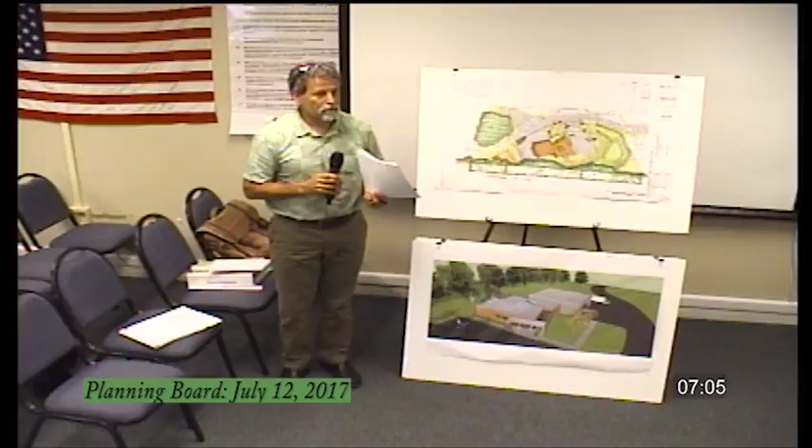If we've missed any, we can certainly discuss those tonight. But I'll walk down through the changes that we've made to the plans. There were a number of conditions that the board had suggested we add as notes to the plans, so I'd like to at least summarize or go through those individually.

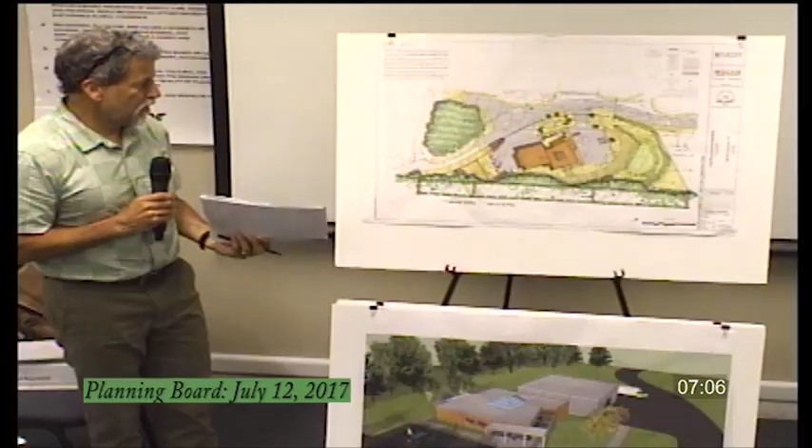On the drawings, I'm going to refer to this site plan, and I'll flip through other site plans if I need to point out items. Item number 1 was the zoning, and the zoning line is shown on the updated plan. The 1,000-foot line that Chris had mentioned for the industrial zone comes right back into this area just beyond the property line, measured from the edge of the right-of-way. So we've added that to the drawings.

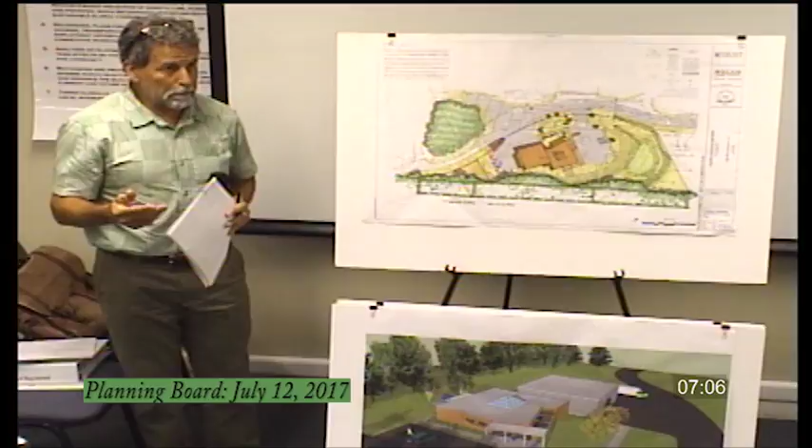Number 2 is that there was a discussion briefly at the board about the buffer, item number 2, along the buffer required under section 4G8, I think it is, under the industrial zoning. I'm just going from memory. That buffer is required between an industrial or commercial use and a residential use within a district line.

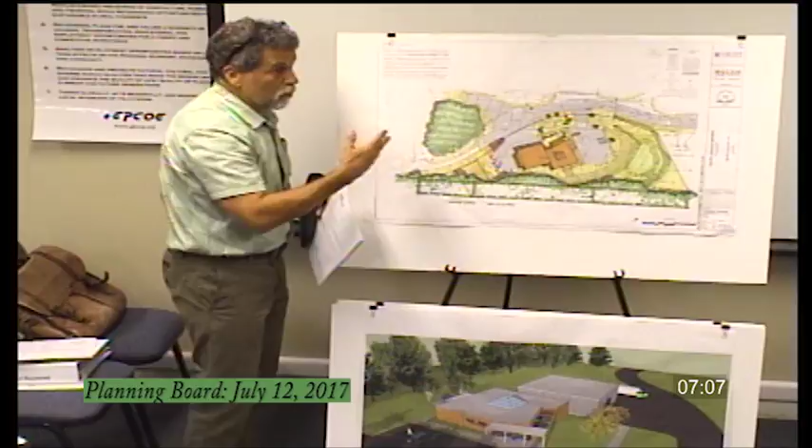I'm actually going to ask for a consideration for a change from what I've already submitted tonight. What we had put on the plans was to extend a 40-foot buffer along the whole length of the property line, and then add a 10-foot covenanted area, not shown on here, on the inside. So the total is 50 feet, and that would be a limited cut disturbance buffer, et cetera.

However, I'd like to propose something slightly different than what's shown on the plans tonight, and I'll explain why. I sent a note over to Jim and to Chris Hansen, and Jim came back with a suggestion, since the lot is such an odd shape here, sort of a fishtail. And under the ordinance, it talks about buffering the use.

Our thinking is that the basic use of the property is from about here to here, and it wouldn't really matter one way or the other. The applicants own the adjacent property, and they're thinking of doing something over there in the future. So if we were to access that property, probably the best spot is right through here. If we had a buffer there, it would really restrict the use of that property, even though we haven't planned anything there yet.

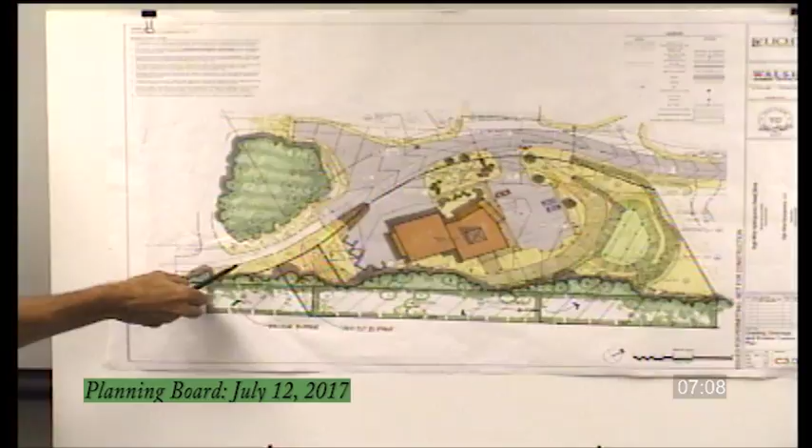So what we'd like to propose is to extend the buffer to a point shown right here—Jim had sent a sketch suggesting this—and then have 50 feet coming back into the site with trees added, so we've met the intent of the ordinance, buffering the industrial-commercial use and meeting the specific criteria, but leaving about 100 feet that, by virtue of it being a very small fishtail, isn't really part of the property, just part of the lot. So if the board is agreeable, we would submit a final condition plan showing that.

Quick question: is that new proposed line the property line or the edge of the industrial zone, or what?

I'm sorry, I should pull up the new plans and flip through them. I see the line, it's shown on sheet 2.1. But it's not really identified. I suspect it's a property line.

The zoning line, as we scale it, comes right up through this area here. So if you take that and go back 50 feet into the lot, this is the 50-foot setback from the industrial-residential zone line. In other words, a portion of this remaining part of the property is all in residential right now, and from this part forward is industrial. This whole lot across the street, not being considered now but for future development, is in the industrial zone. If that answers your question.

So you're really proposing just to take the buffer to the edge of the industrial zone property, and come in from there? Yes. Okay.

The second item discussed was a waiver of the access width. We had reduced on the plans, reduced the throat here upon suggestion from the planning board and from Jim Seymour, to sort of close up this gap. We've made this a 70-foot width, and I believe the board acknowledged that at the last meeting, and this would be grassed buffer through here.

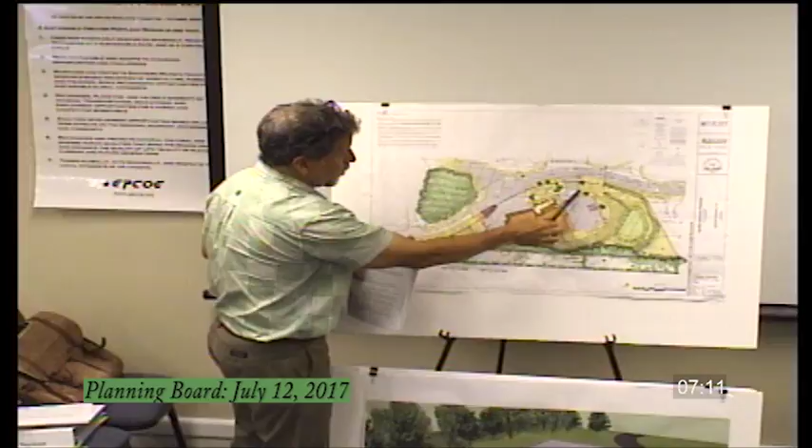So in response to his comment, we put some curbing in through here, along this edge and through here, and there's curbing on the front face too as you come into the building, and added a catch basin so the water would enter it. We already have a pipe system across here - we shifted it, so there's a catch basin here collecting road water. There's another structure here, and that all discharges in the same location.

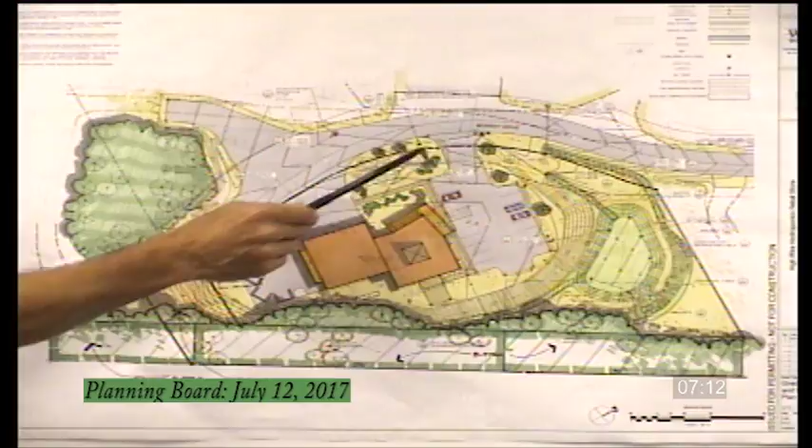So the new one's catch basin 3, correct? Yes, exactly, and we've addressed that. That's per Jim's comments, so I believe we've addressed that comment.

Item number 6 was lighting. In your packet, we added 2 light fixtures at each corner of the parking lot. These are LED cutoff fixtures, consistent with the same model being used on the building, and lighting cuts were included in your packet, the Spalding fixtures.

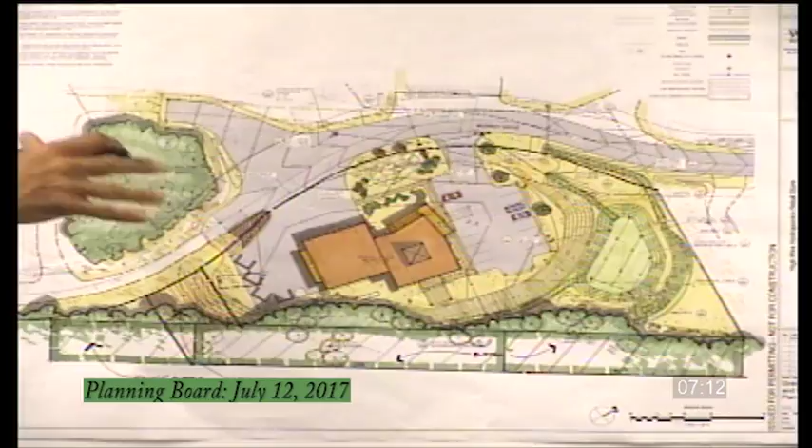And the last was landscaping. I think we were certainly in agreement, if I understood the board, that rather than go to a full landscape plan, if we use this general concept and worked it out with the planner and with Scott, or with Chris, that would be acceptable. So as part of our record, we included a reduced copy of this in your packet, if that's suitable.

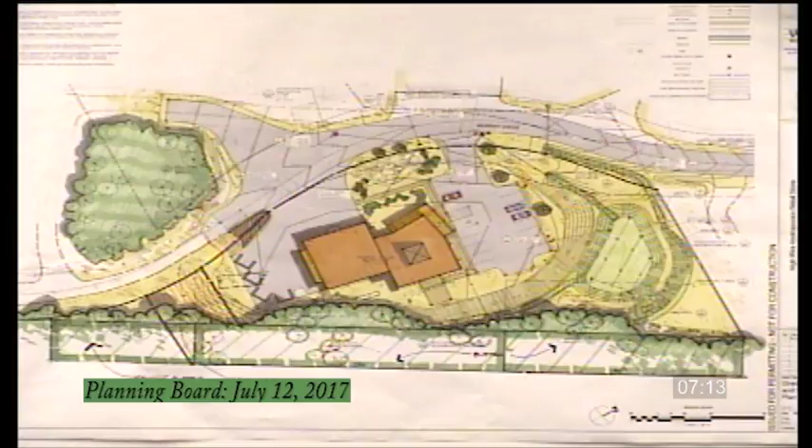When they go to landscape the property, since they're in the landscape business, they would come up with a plan suitable to Chris and Jim and implement that, if the board's acceptable to that. So we've included a reduced copy of this as a point of record.

Are there any comments on those items, or have we missed anything else that the board had on their checklist? No. One question I have is paragraph K, other consideration on Article 9 standard.

The last italicized comment from Jim says: to date, we have not witnessed any draft or legal documents suggesting the easements have been secured for the relocation of Murray Drive and the rights-of-way extension on either side, or that they have acquired the necessary right, title or interest to alter the lands and right-of-way easements. The planning board shall discuss the situation.

What do you have on that?

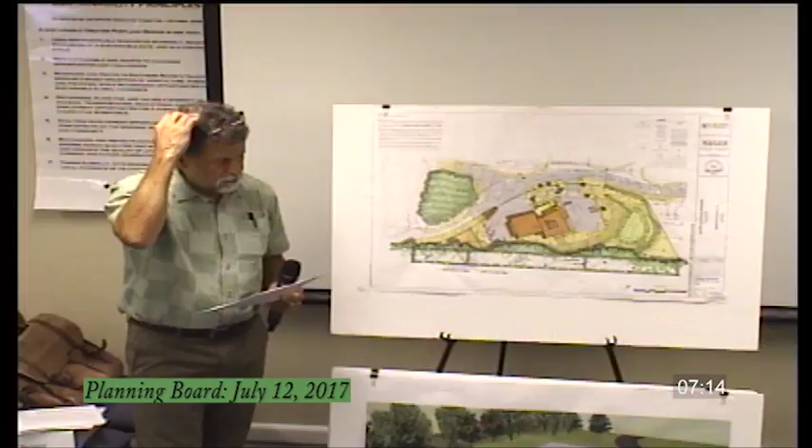Mr. Chairman, what we did is we've been working with Braun and Wilson, with Jeffrey Wilson, the attorney for the applicant. At this point, without paraphrasing the board's intent, our thought was that it would be a condition of approval.

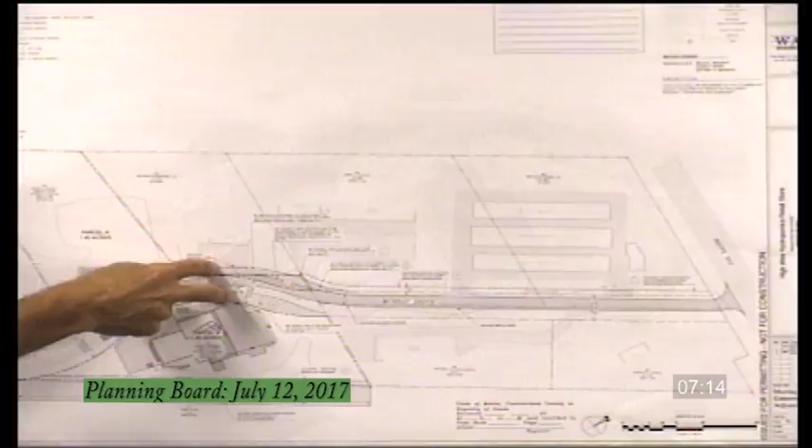What we've done at this point is there's been a meeting with the owners of Murray Drive, and there are draft documents which we weren't able to get in the packet earlier, but we have them and submitted a copy to Chris and Jim a day or two ago. The intent, for edification, was shown in this plan - it doesn't show well, we had a colored version that's been updated slightly - there are a number of small easements that would have to transpire between parties, shifting of the right-of-way from the current right-of-way, and granting of rights within those easements for access and utilities.

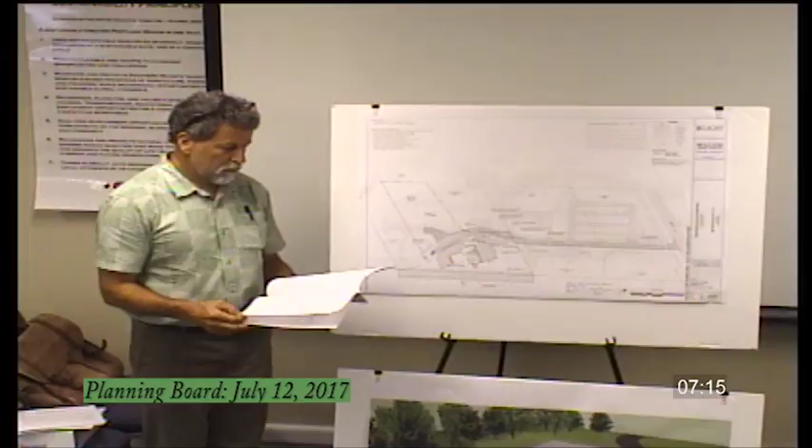At this point, all the current property owners have acquiesced, at least in principle. The attorneys have drafted an association and articles of association documents, and we submitted a draft copy for the introduction of an association meeting, at which time they would all get together and sign the association documents. Then there's a draft easement that was provided to the board as a sample that would be given to each party to transfer the necessary easements.

That would all go in concert with this plan, and per the board's request, we made this plan into a recordable plan. It has the recording information and a planning board signature block. The board would sign this plan, which references all the other drawings, and that would correlate with each of the easements when they're all executed.

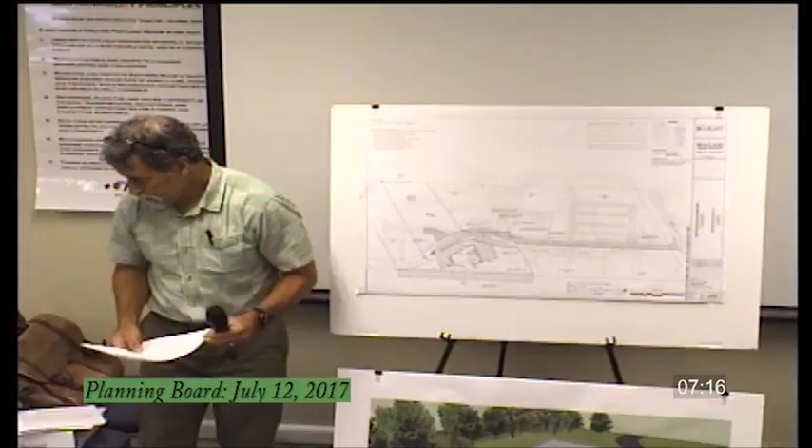So that is in motion, and the idea of setting up and establishing an association is in motion. I think the key issue for the board is that it's a condition of approval - that association document be executed prior to the issuance of a building permit, before they get the final building go-ahead.

Rick, do you have any comments on the proposed schedule for shimming, grading, paving, striping, final paving, et cetera, that's on page 6 of Jim's document? Yes, I'll have to refer to my specific notes but try to paraphrase. I think we put together a note on the plan, based on our discussion with the board, that would phase in the construction such that the initial road would be widened.

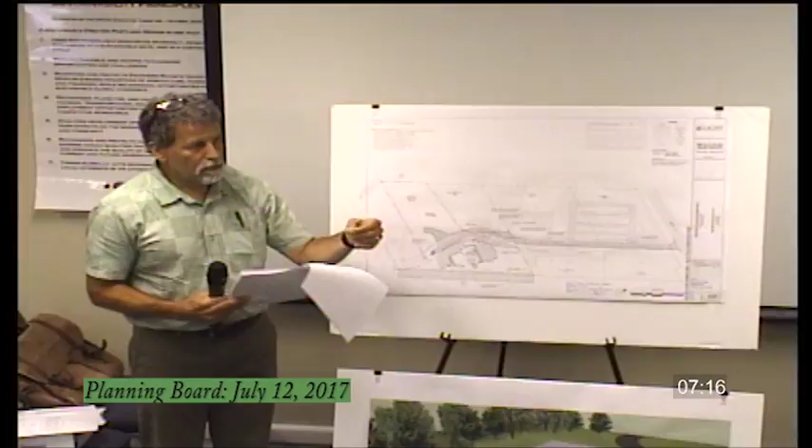We've got ditch work to do - there's improved drainage up here. That work needs to be done prior to issuance - I'm reaching here - of the occupancy permit, building occupancy permit, and then within one year of that occupancy permit it would be paved. I believe that's what our note says, but if anyone disagrees with me I'd have to read it.

Then there was a timeline after the base paving had been through one winter - that by June 1st of the following year, they get the final coat of pavement. I think Jim pushed up your schedule a little bit in his memo. That's received.

If you look at the plan notes in our memorandum, all of these items - if we want to add clarification - are all there, including the road, number 8, and the association item we just talked about. What we're doing is, by having contingency on the building permit and occupancy permit, those schedules need to be enforced, and we're delegating that to staff to ensure they can enforce it based on those two things.

Without a magnifying glass, I couldn't read that, but I'm assuming that's what it says up there. They wanted small amounts. Yeah, who wanted the small one? That's the problem - we have a full-size set of plans, we can't unroll anything, and a half-size you can't read it.

Mary, you have to bring your magnifying glass from now on - that's just a new piece of equipment. Well, my apologies. What I've done in the past, and I should have done, is I usually submit an 8.5 by 11 copy of just the notes so you can read through them at a reasonable scale. My apologies, I'll think of that next time.

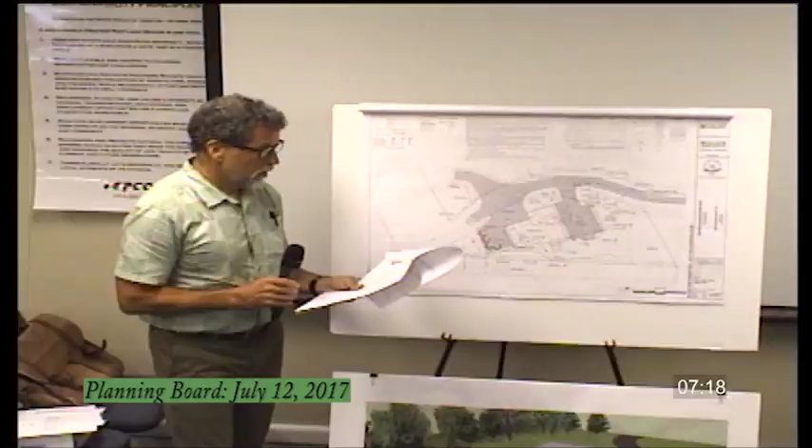So if you want, I can go through the plan notes that have been added and make sure that we've addressed all the comments, and I'll do these in general and then specific. I think the only thing the board would need to adjust, Mr. Chairman, would be clarification on that 50-foot buffer.

I want to make sure that it's clearly documented somewhere that we've agreed to this cut. If there's no objection by the board, I think it's more than a fair interpretation of the statute that it's a 50-foot buffer behind the actual use of the commercial industrial space. So staff would recommend that that get put on the Mylar.

Before you sign the Mylar, the staff will review it to make sure it's what we discussed. That would technically be the only change, and I think as time marches on, we want to make sure that if the day comes you're using that area, there's no misunderstanding that we approved to leave that open. Can you flip that page back so we can look at that?

So Sheila, that buffered area will need to be on the recorded plan that's at the registry, so that is in perpetuity. Just don't want it to get lost, I'm sorry, through the chair, this would be the recordable plan that would be added to this plan here. So before you sign that, we'll make sure that the buffer's on there. Does that make sense, Bruce, what I just said?

Yeah, what you just said. I think if we're going to be going for final approval tonight after board discussion, we probably want to make that a condition of approval, that it just be so drawn on the recordable plan, and also have a written description, usually we do the metes and bounds of the buffer, taking it to the left property line and the end of the industrial deed zone.

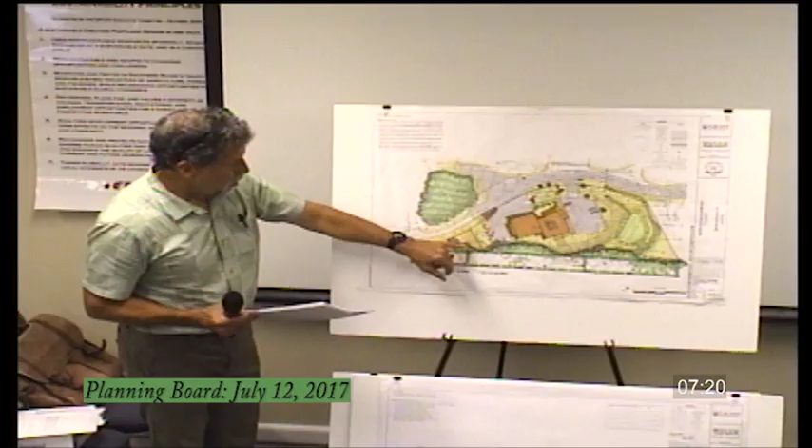Right, a legal description of the buffer. Correct. And it'd be two pieces. There'd be a legal description of this easement here on this lot, and then one of a covenant on this lot, since you can't give an easement to yourself, so that it equals the 50-foot buffer. So it'd be a covenant within the deed.

Because I think if you had the 50 feet on your property, you would have used it all. Right, but technically they own both parcels. Yeah, we can provide that. Okay, any further comments or questions from the board?

I have no more. Anyone else? Good, all right, thank you Rick. Thank you. Jim advises us that we should go through Articles 9 and 10 of the minimum standards and site plan review. Mr. Chair, we did that at the last meeting. Oh, you did? Yes, we went through all of it, and that's where all of this stuff arose from.

Okay, so I think just ensuring that each of those items was covered and documented on the plan, with the one change that Chris will ensure, and our legal description, I think we're ready to move to final approval by the planning board. Correct. What additional discussion do members have regarding what we've heard so far?

I don't think there was anything else. I think everything was addressed in the final presentation. As I say, I appreciate it, it was very well organized. Well, the only condition apparently, if I'm hearing correctly, are...

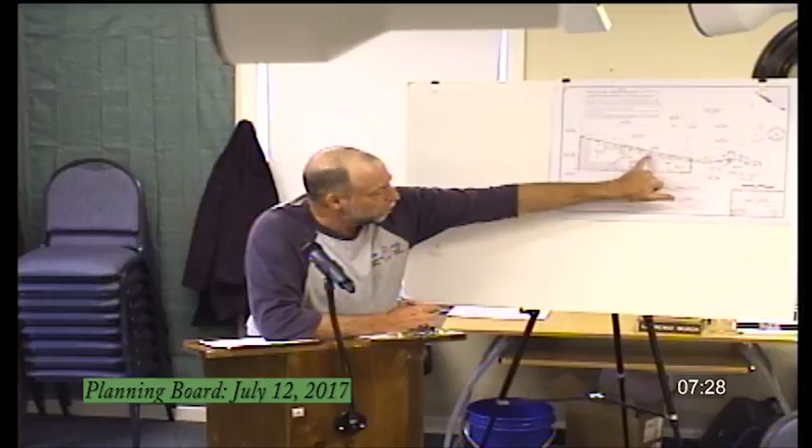What they're proposing to do is they've got, I guess, medical issues with a child that they need to get some money to pay for. Their process to do that is to see if they can develop a couple of lots out here. They've got an interested party that is interested in buying the first 2 lots that can be sold outside of subdivision. She'll then hold the remaining land till a later date. If they choose to do anything at a later date, they would then move the turnaround that's been proposed as being temporarily here to the end for that.

At this stage, they're looking for the private way approval to allow that to take place.

We've shown on the map the layout we're proposing to come in off of the existing road into this turnaround, which I'm not sure ever got built on the original version. We have an easement located on this small triangle over her mother's land that she's willing to grant so we can achieve the necessary turning radiuses for emergency vehicles to swing and come out into the rest of this right of way.

In a nutshell, that's what we've proposed to do. We'd certainly like to entertain any comments or questions and see if we can move this thing along.

Where specifically is the end of the existing private road on the plan? Is there a station number that the end of the road exists to? You're gonna make me try and read over that, aren't you? I'm gonna have to back this up a little bit so I can get in there. I'll agree with you on the size of some of the print.

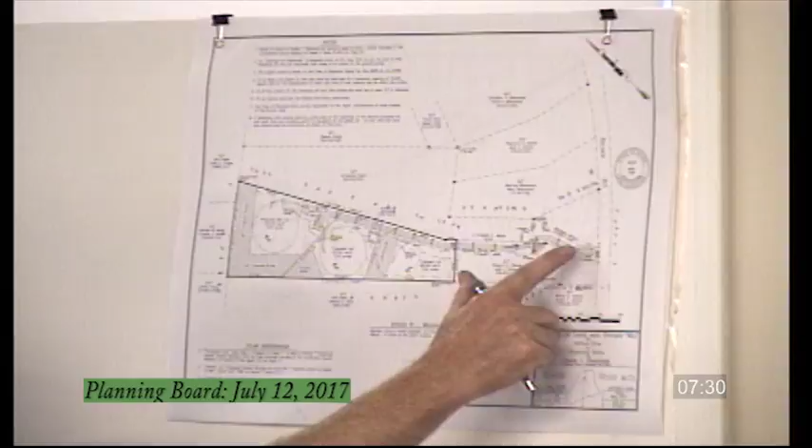My guess is the existing road is built to somewhere near Station 3. The houses that are there are located at the front, and then the other one is right in here. The driveway comes into that at Station 2-ish, so it's constructed to that stage. Okay, so roughly 200 feet in from Route 85. Yeah, 200, 250, something like that.

Has our code enforcement officer and town planner shared with you all of the questions they have about this particular project at this point? I sat down with both Chris and Jim and had a discussion on this, and I think we got to the bottom of most of it. Because, quite honestly, based on their technical review, there's a number of items that need to be addressed.

Mr. Chairman, I would suppose that this application is not complete at this time. I think we should entertain public comments and then have the board provide additional comments to the applicant so we can reconsider this in August, if you would see that as appropriate.

I do. I read through Jim's memorandum, and I agree there are a number of things that he notes as having needed to be added or changed to the plan. So I agree that it's not a complete application at this point.

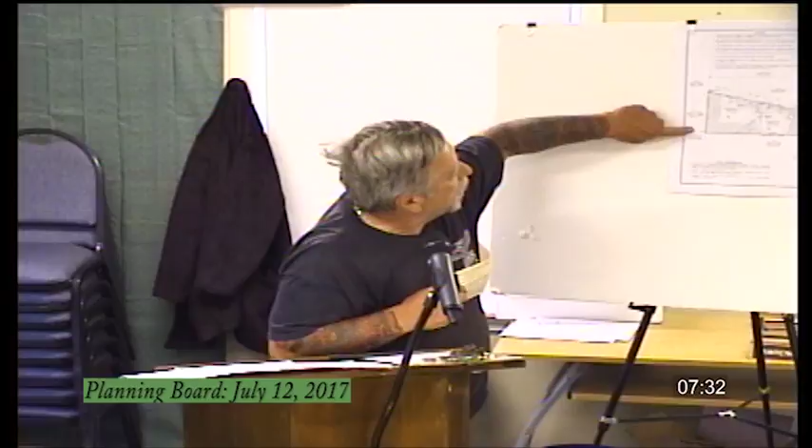Yes, my name's Michael Wood. I live at 67 AI Road in Raymond. I'm the abutting property owner to the back of this proposed project, right there. Can you show us which is your property on the plan here? Right here, on the end. Yep, Michael and Pamela Wood. We own that abutting property to this here.

Questions I have are: they want to build 2 houses here now, and possibly a third on a gifted lot, correct? Correct. All right. What type of houses are going to go in there? Are there any trailers going to go in there?

I am not sure what the zoning is there. I think that trailers — is this a straight residential district, Chris? I believe that's rural residential, which does allow mobile homes, or manufactured homes.

All right, there's a brook and wetlands back here. How is that going to be affected? I believe that's mentioned in Jim's memorandum as an issue that does need to be considered. I believe his memorandum calls out the fact that there are wetlands along the far western edge, and that's one of the things that needs to be considered by the applicant.

All right, my final question is, how long of an extension of Nicholas Drive are they asking for?

So what they've done is reconfigured the right-of-way to allow a curve that will meet our road standards. But one of the issues is, I don't know if Wayne is aware that our ordinance requires for road extensions of up to 4 or up to 10 lots a 16-foot road width, not a 12-foot road width, with 2-foot shoulders. What is on the plan on page 2 is 12-foot with 1-foot shoulders, and he's also mislabeled it Fry Road Extension rather than that. I haven't seen that, but that would need to be corrected.

So in that particular case, if you were to try to stick with that, we would need a formal waiver request from our road standards. Correct, and part of the discussions that had been had over time with staff indicated to my client that a 12-foot wide road was sufficient, but I questioned that myself and said, okay, that's not what I'm reading it to be. We'd have to ask for a waiver.

The other piece, while we're talking about the existing section, is we would need some confirmation that it met our road standards for thickness of materials, depth, shoulder. Because my understanding, sir, is once you open it, the whole thing now becomes under consideration as a private road extension, and that includes the old portion. So what we're being advised is that we need to get the information on that existing road to make sure that it meets our standards. So that would include cross-sections, we need to know what's under there, all that kind of stuff, correct, Chris?

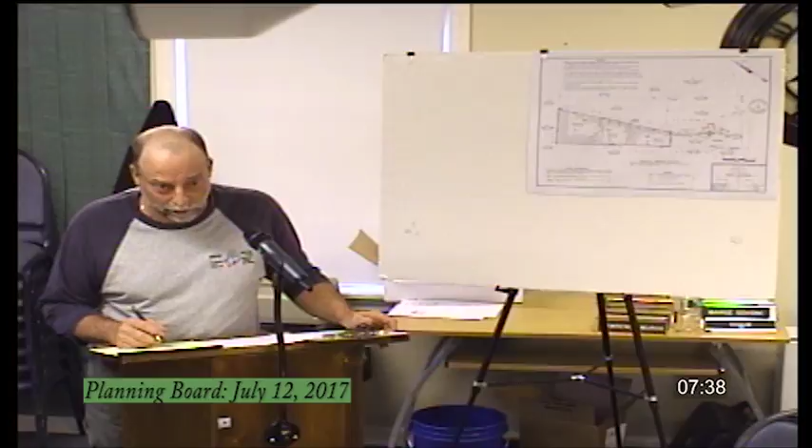Correct. And I would recommend possibly that the board do a site walk. My suggestion for determining what's there is, if this gets to an approval stage, when we get ready to do construction and have the equipment sitting there, we can dig into the road and determine what's there with inspections from staff and deal with whatever we need to add to it to make it work.

Well, I think what we're saying is that we would be entertaining a condition for approval that you would agree to take the existing section of Nichols Road up to standard. I think that would be perfectly fine. Yeah, I'm in agreement with that.

I just want to be clear that not only is the typical Fry Road extension note wrong, but according to Jim's notes, he would want to see a total width of 20 feet with 2-foot shoulders on each side, which would lead to a 16-foot wide actual roadway travel. That's what he's recommending. I don't think the board is going to be, I can't speak for the board, but my own feeling, I don't think we're probably going to consider a waiver of that 20-foot total width.

And then we're at item 3. The applicant needs to address the engineering requirements for culvert placement and stormwater management, a surface grading plan, culvert placements. The applicant has not provided any engineering of the sizing or details of the level lip spreaders and potential location of the culverts, so we need some design work done. Apparently he indicates he intends to use the point system for phosphorus export treatment, which is fine, he just needs to list it out and itemize how he's doing that. But the surface grading plan, how the water's gonna get to these level lip spreaders and where the culverts are placed and sized, that needs to be engineered.

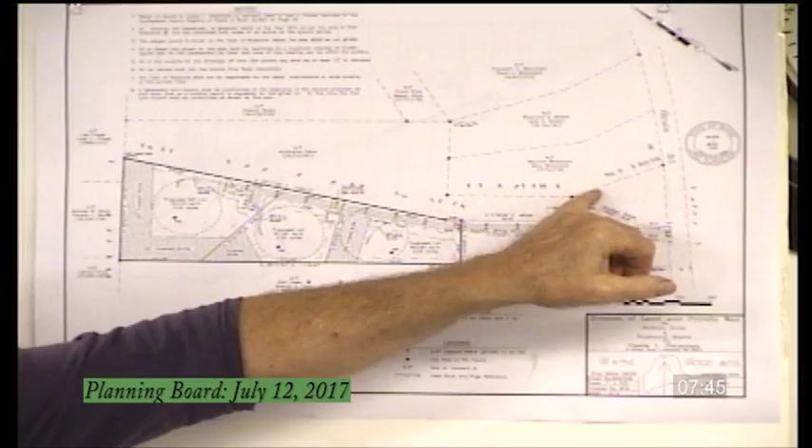What I think we're suggesting is on the 2 new lots that are ready, we'd like to see proposed driveways in terms of within 200 feet of the property. This guy's driveway is within 200 feet of the property, but is that really what you're looking for? I don't think so, I think it's of the road that we're proposing, correct? Correct, the proposed road. Gotcha.

One of his notes was there should be a note of how the stumpage will be handled - if it's going to be buried on site, or removed by a contractor. We'll add that note to the plan. Okay, that's an easy one too.

And we can get you a copy of Jim's memo, which I don't know if you received yet. I got it yesterday. Okay, so everything we're talking about is pretty well covered there by section.

That's why we haven't had a chance to address any of it in any depth yet, because we just barely got it. In fairness to the applicant, he was under a very small timeline to get us materials. So he got what he could get, appreciated, and then he'll provide the rest.

And I did hand to Chris this evening - I did finally get the actual test pit logs to go with the test pits that we showed. Okay.

A note on that - typically we require 2 test pits for new lots, that's in our ordinance. We may want to just waive that, and I can have the second test pits before I issue a subsurface or septic design.

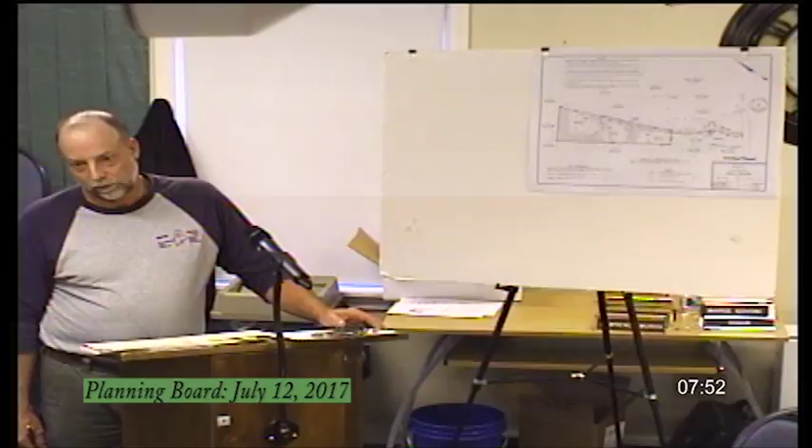The fire department got up my driveway. I just stood in amazement when they brought that big truck up my driveway.

Do we have other discussion by the board at this time? I want to consider a motion to table this application as incomplete. So moved? Second? All in favor? Opposed? All right, we will be at the site walk on Monday, July 17th. Thank you very much. Thank you.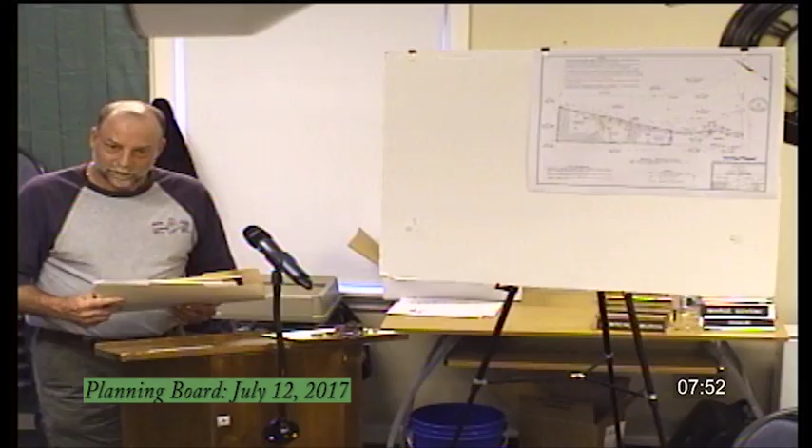Next order of business is planner communications. Well, Jim's not here, so I guess we can't do that. The Zephyr Associates application, which is an addition to Raymond Ready Care, is being done as a staff review. We're still waiting for a few more materials before we can report to the board on how staff found on that. They're 90% there, there's just a couple of things we need, and Jim and I will review that, and at the next board meeting we'll give you an update. So you expect that may be forthcoming in August? It won't be on your agenda, it'll just be a communication. It's a staff review. Okay.

Any other items that anybody wants to bring up tonight? I'd like to welcome our new planning board member. Danielle, your name's Danielle, correct? It is. Hi, sorry I was tardy to my first meeting.

No, you weren't. You were right on time. We had a minute warning. You sat in your seat. We're good. You gotta get you a nameplate, and it's already ordered. All of us have been late at least once. We've made phone calls and woken people up, if I remember correctly. Oh yeah, I'm famous for that.